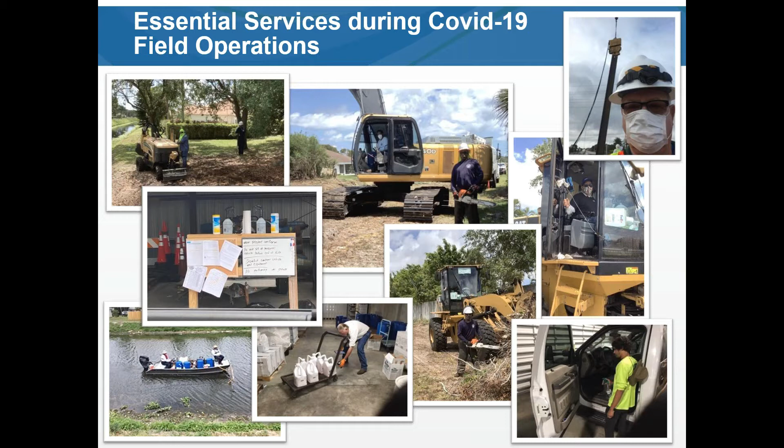You can see everybody wearing their mask, and even in the aquatics boat they managed to stay socially distanced and safe. We posted daily orders on a bulletin board in front of the shop using some old technology, but it worked really well.

In the office, we did a lot of disinfection work. We did a lot of Go-To meetings, Zoom meetings, Microsoft Teams, and it worked out quite well.

Even today, with most of the staff back in the building, we still do the meetings remotely, so we don't have to congregate and risk the spread of COVID.

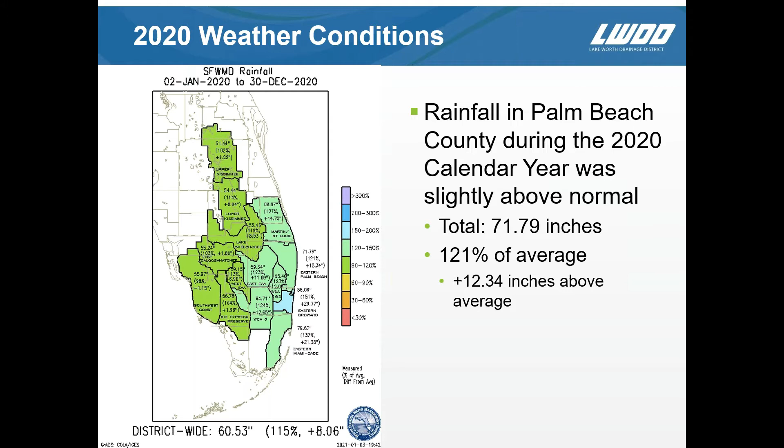With regard to weather, not much to say. It was pretty average, slightly above average in Palm Beach County. We had a total of 71.8 inches, which is about a foot above average, 121% specifically.

Another way of looking at it is to look at accumulated rainfall over the year. The green area is normal rainfall accumulation. The yellow or tan area shows below-average rainfall.

At the beginning of the year we experienced fairly dry conditions, getting about half of normal rain in April and May. Then when the wet season started in late May, early June, we were pretty much on average until October.

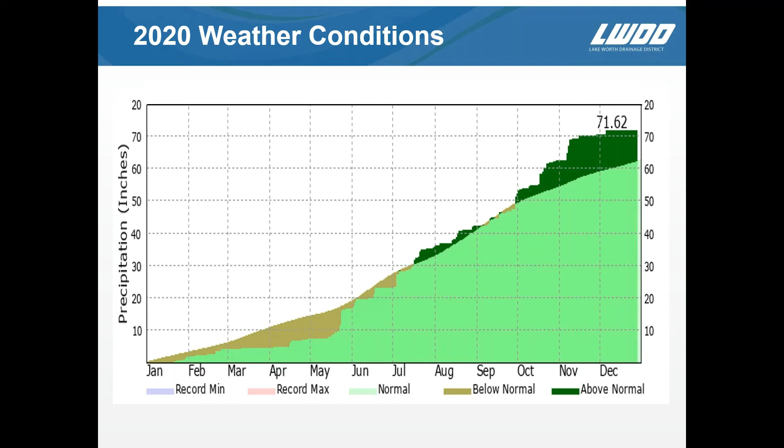The wet season started a month early, and we've been receiving above-normal rainfall ever since. That has been reflected in the current stages of Lake Okeechobee.

Lake Okeechobee got close to 16.5. The Corps of Engineers, in response to that, have been making releases to the estuaries and south into the Everglades to try to pull some of those stages down.

We expect that trend will continue, and we're going to be watching it very carefully, because while the Corps definitely needs to pull stages down to protect the Herbert Hoover Dike, we have concerns if it gets too low at the end of the dry season that we could have issues with water shortage.

Under normal operations, this is a pretty good place to be from a water supply standpoint. We wouldn't expect there'd be much, if any, competition over water supply between the estuary, urban, or agricultural users.

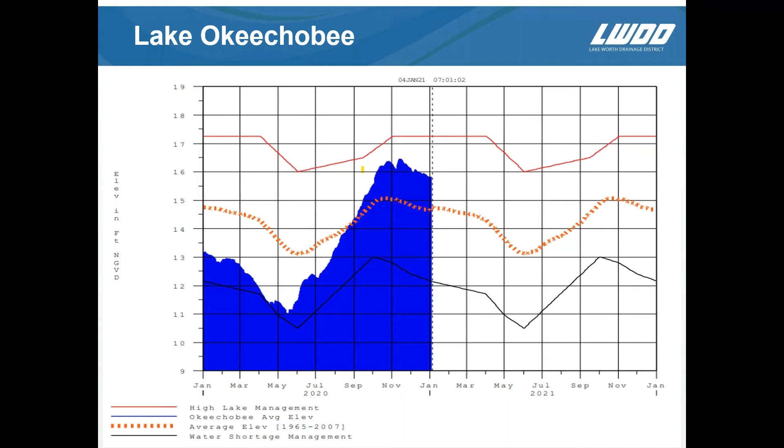But the Corps of Engineers has approved a temporary deviation that could potentially allow them to pull the lake down to very low levels, below 12, into the 10.5 range. We'll be watching very carefully what actions they take in that regard, and what effect it may have on water users in the lower East Coast.

Switching gears a little bit to capital improvements, we did have some major capital work done this year. We replaced a really old culvert crossing on the Hillsborough Canal at the intersection of Hillsborough Canal and our E1W South outfall.

You can see in the bottom left the photograph of the culvert that existed. It was decades old and was approaching failure condition.

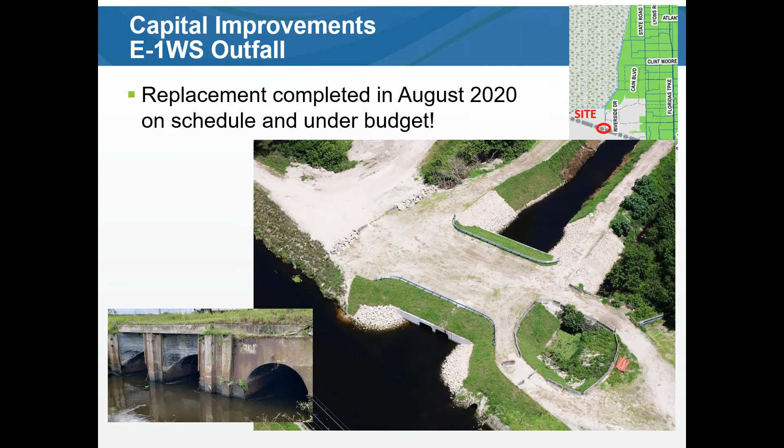And that's one of our major outfalls for the southwestern part of the district. We were happy to see that completed, and hopefully it'll last us a century or another century or so.

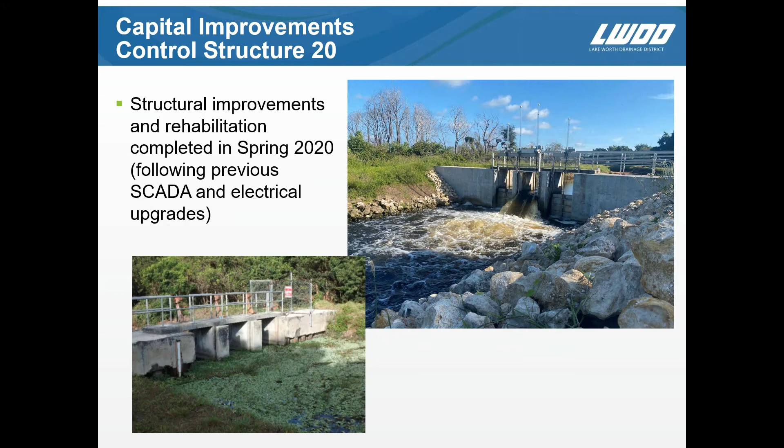We made some capital improvements to Control Structure 20, again on the same canal, E1W South. Last year we had installed the SCADA system on that so we could operate it remotely. But the engineer identified some structural problems, and we were able to go in and remediate those to get the structure back in shape, and again hopefully last us another few decades.

Control 9 was the big focus over the last year or so. We had gone out for construction bids for relocation of the structure on Stanley Weaver Canal at Lawrence Road. We received and rejected the bids, however.

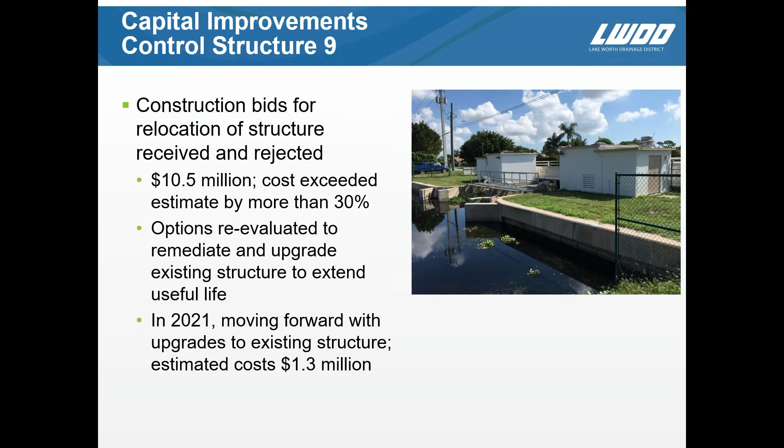The contractor's cost estimate was $10.5 million. That exceeded the engineer's estimate by over 30%. Given the concern over potential revenues associated with the COVID pandemic, we looked at options to reevaluate and remediate and upgrade the existing structure to extend its useful life as an option to relocation. So in 2021 we intend to move forward with upgrades to the existing structure at an estimated cost of around $1.3 million. Of course, structure maintenance is an ongoing part of what we do.

We regularly service and maintain 10 major water control structures. We're continually monitoring the health of that system and those components to ensure they can operate for both water supply and flood control. We instituted over the last few years a series of preventive maintenance protocols, and we completed about 120 of those over the last year, and we perform unscheduled maintenance as needed.

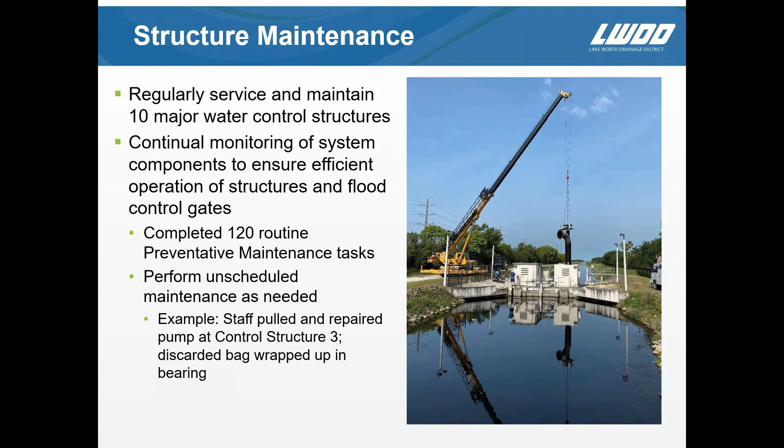This photograph is an example of that. We had a discarded feed bag wrapped up in the bearings of the pump. We had to take the roof off the structure, pull the pump out, and clean it up, but that's business as usual in Palm Beach County ag areas.

One of our biggest programs has been the Canal Rehabilitation Program. If you remember, we identified about 180 miles of canal that were impacted by extensive vegetation growth, mainly on the low maintenance side of the canals. Over the last 5 years we've been hitting that really hard. You can see the progress made to date.

We had 128 miles completed since October 2015. That was broken down: we did about 69, 70 miles ourselves, we had contractors do a little over 50 miles, and developers and other initiatives got another 5 to 6 miles.

We're almost done. We figure we have one more year remaining. We have about 53 miles remaining, and we expect completion of tree clearing this year, excluding 10 miles that has right-of-way ownership restrictions. In the past 12 months we completed 30 miles.

I just want to point out, in 2015, when we were bringing this to the board, we were hoping we could get over 7 miles a year. They've consistently done 20 to 30 miles a year. So it's a testament to the folks that are out there and all the staff here doing the work required to move that project forward.

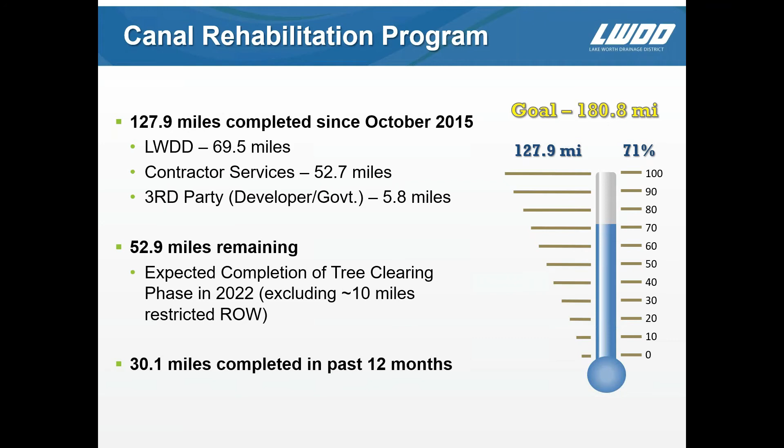It's not just a field operation. It requires coordination of district-wide staff, requiring participation by everyone. We have surveyors that research and map right-of-way. They did about 87 miles of canal this year.

We go out and photograph extensively each project, and we use a GoPro 360-degree video camera. You can see it mounted on top of the truck right there, and that allows us to have a complete view and a historical record of the condition of the canal before and after the work is done.

Then we have to field stake the canal right of way, so we know where the line is, as well as adjacent property owners. We certainly don't want to be damaging private property, and so it's important that we take those surveys and field stake the work so we can stay clear of impacting adjacent property owners.

We prepared and distributed more than 1,400 notification letters that were delivered either by hand or by mail. We fielded about 730 project-specific public inquiries through emails, telephone calls, visits here in the lobby. We hosted 7 project-specific public outreach meetings with residents and neighborhood associations, and we continually update the information and the project status on our website.

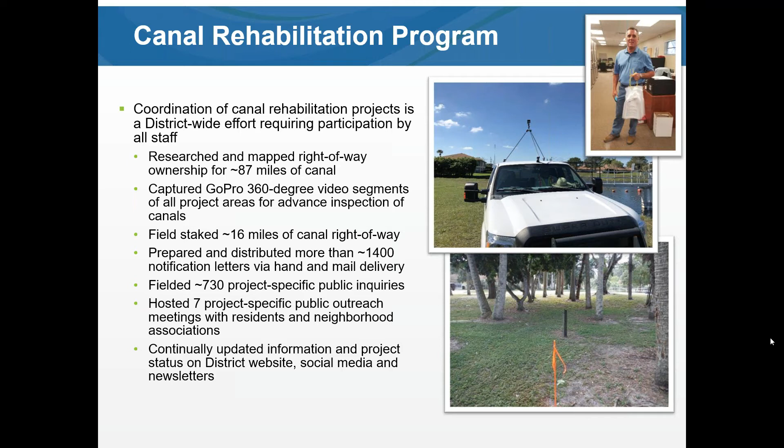And if you haven't been to it, literally every piece of information that we pull together in support of these projects is available on the website for the public.

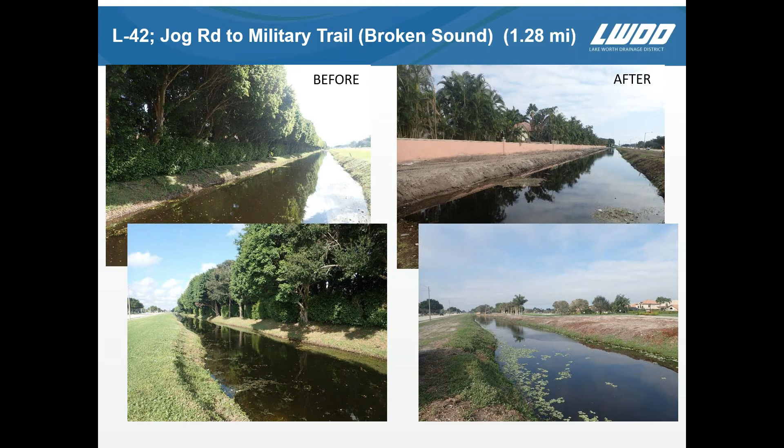Now I'm just going to quickly go through some before and after perspectives of the work that's done. Here's an example, L42 Jog Road to Military, in the Broken Sound area. This project was about 1.28 miles long. You can see before, although it was well maintained, all that vegetation on the upper left photograph is on district right-of-way. Afterwards, you can see what's just off our right-of-way is the privacy wall of the development, and a similar situation on the two photographs on the bottom.

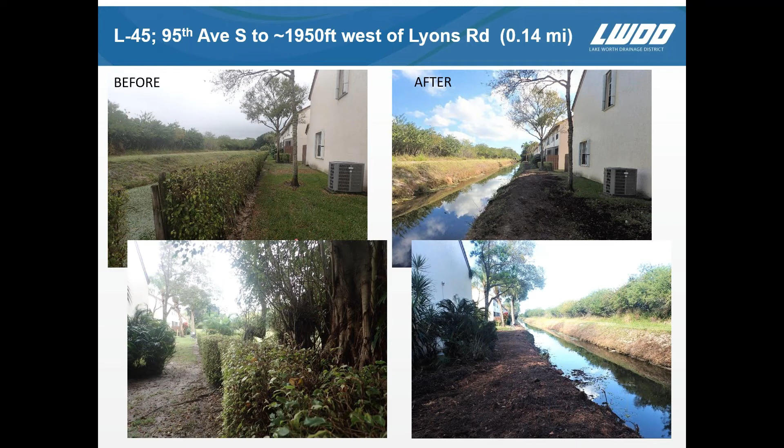L45 from 95th to west of Lyons Road. Again, you can see hedges planted, a fence, and some other things that were obstructing the right-of-way that were cleared in the project. It was about 0.14 miles.

Similar situation on the Spanish River. It's CCRP number 8, portions of L12 and L13.

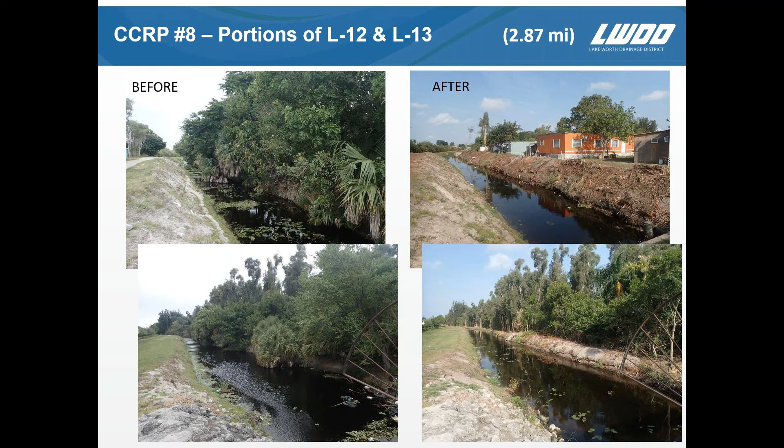Here's a reach of the canal that we actually didn't do the work or have a contractor do it. The adjacent development, that's a brand new development on that upper right photograph, came in and developed a previous agricultural parcel, and in doing so, they restored the canal bank and removed any vegetation that was in the way.

E2E from L42 to Clint Moore, Okeeheelee Park - again, there we only removed Australian pines because of the limited right-of-way that we had. But those particularly can cause problems in a wind event. The root system isn't adapted very well to the high water table we have in South Florida, so when the wind blows, those things just tip over. We try to focus on those as an area of priority whenever we can.

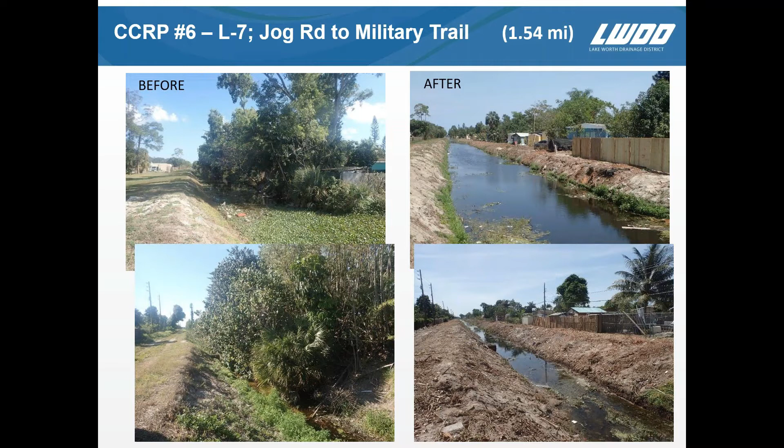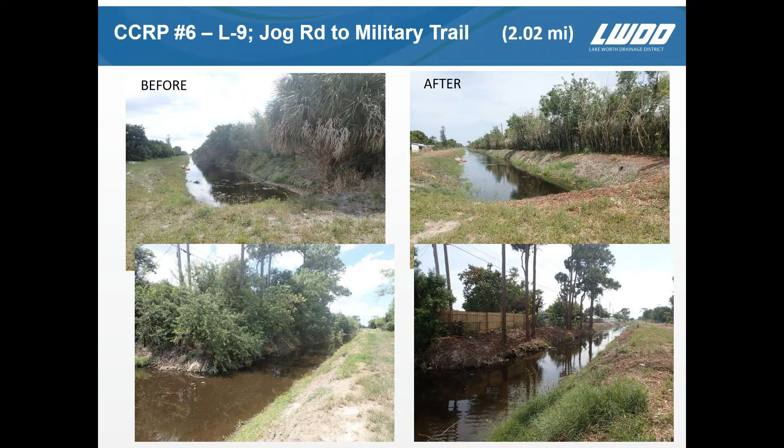This is L7, Jog Road to Military, and again almost all that vegetation was exotic. Similar situation on L8, L9 - and you can see on the bottom right on L9, there's some pine trees, native trees that were left, and we left them there. Hopefully they'll get through this okay.

Now, you might ask, how did we get over there to clean that out? The answer is we hired a contractor. They had a barge and floated the heavy equipment in. They'd put the debris on the barge and haul it off to where we could pick it up and put it in a dump truck. So it was a particularly challenging reach of canal, and we managed to do it without any real impact to the adjacent refuge.

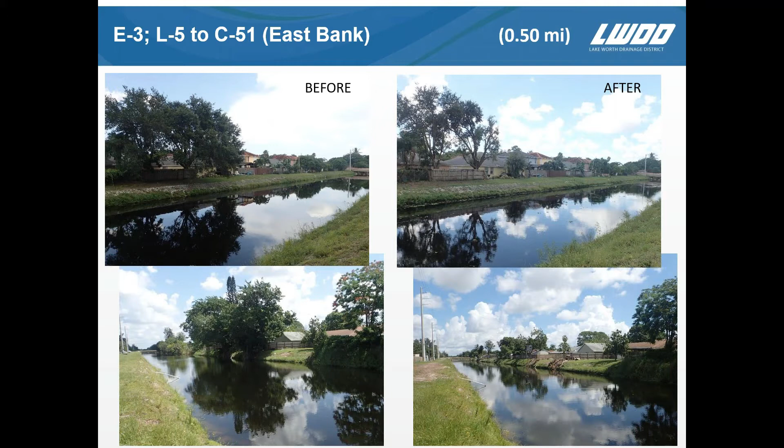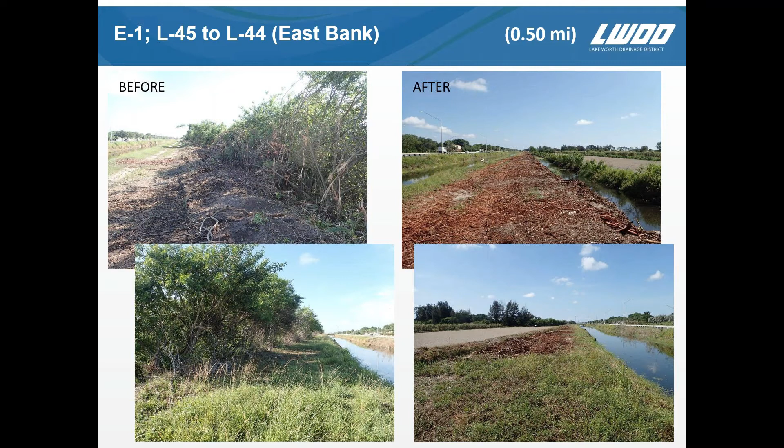Now, because it's exotics, you've got to come back pretty quickly and treat that area so you don't start having Brazilian pepper seedlings pop up and take over again. But that becomes a part of our additional maintenance that we pick up when we clear these areas, and we'll talk about that in a minute too.

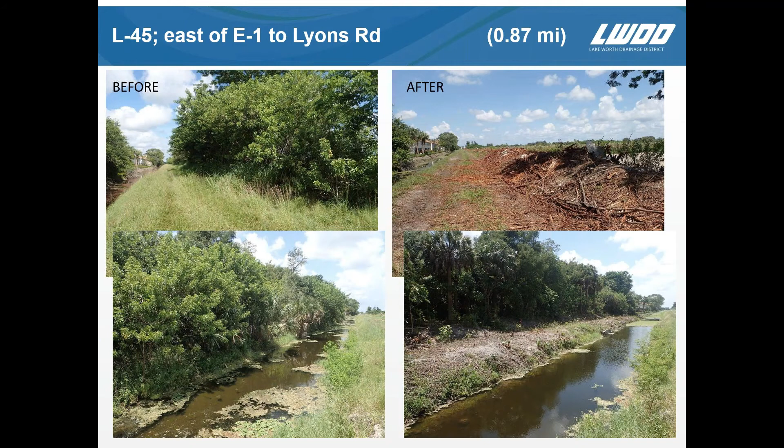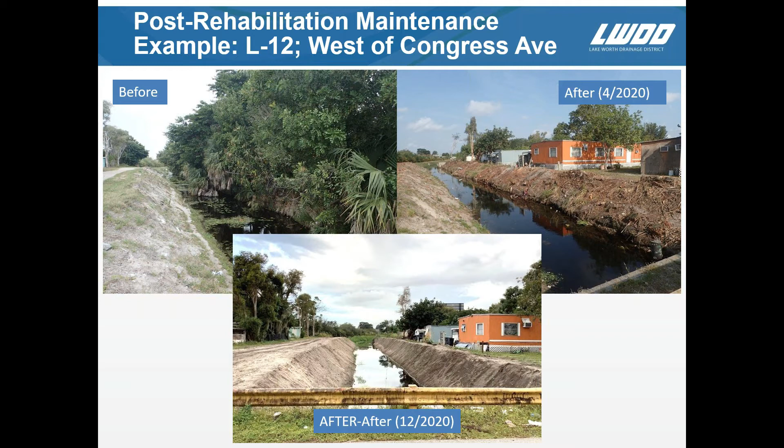E3. Here's one where we had gone in, cleared the area, and now we had the opportunity to go in and do some work on the canal. So it's that bottom center photograph where now that the canal is clean, we make an assessment on the hydraulic capacity, and if we need to, we come in and shape the banks to do two things: one, to ensure we have the hydraulic capacity, but also to assure that we have sufficient space on the canal banks to mobilize equipment to do maintenance work.

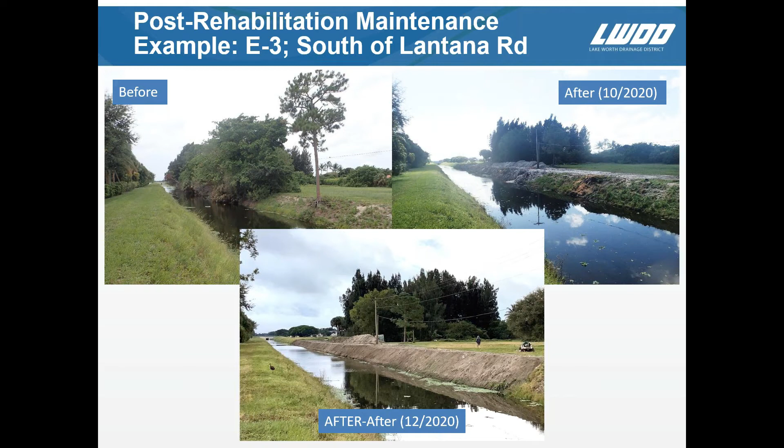Here's another post-rehabilitation area where we cleared it off, and then now we had to come back and do some work to the canal banks.

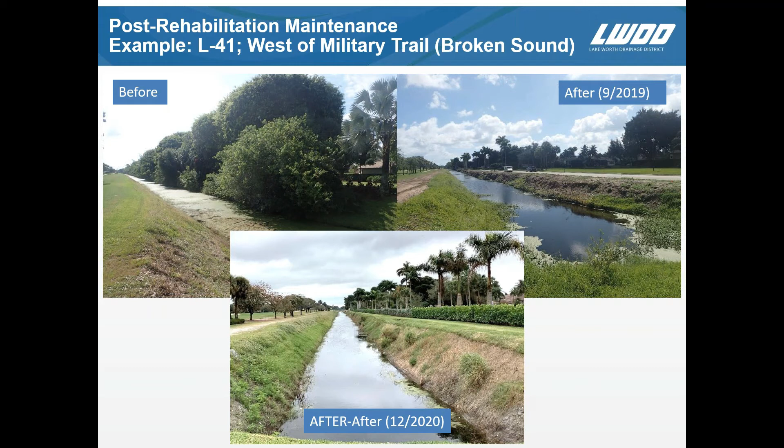And again, here's Broken Sound again, and the after photograph there in the center. We worked really closely with them. If y'all know Broken Sound, they had beautifully manicured ficus trees on the border of their property. It was part of the amenity of the development. And of course, a lot of people had concerns about what was going to be the condition of the right of way after we removed those specimen trees. We worked with their landscape architect, with the homeowners association, and a lot of residents, and what they planted back, you can see on the center bottom photograph. And of course, all of that is outside of our right-of-way now. They're happy with it, and we're happy with it, so I'm calling that a success.

Here's another photograph, same project there in Broken Sound.

As I mentioned, now that we clear these areas, particularly on the high maintenance side, it's very wide, it gives us plenty of room to park equipment, to do work like you see in the upper right photograph. The low maintenance side is much narrower, and that was established literally back in 1915, 1920, when the district was first laid out. The idea was you just reach across the canal if you want to do maintenance. And of course, that's an awkward situation.

Back when you had farms there, it was pretty easy to do, but when you have residential development, now it becomes potentially a hazard. So we had to create and look at new technologies to help us maintain these narrower top of bank areas. We use a skid steer, I'll show you in a minute. We got a little spider mower, we're experimenting with that. We actually installed one of those grinder units on one of our long reach excavators so we could reach over the canal and grind material where we don't have access to travel. And of course, herbicide treatment is kind of the last resort, but we have that available as well.

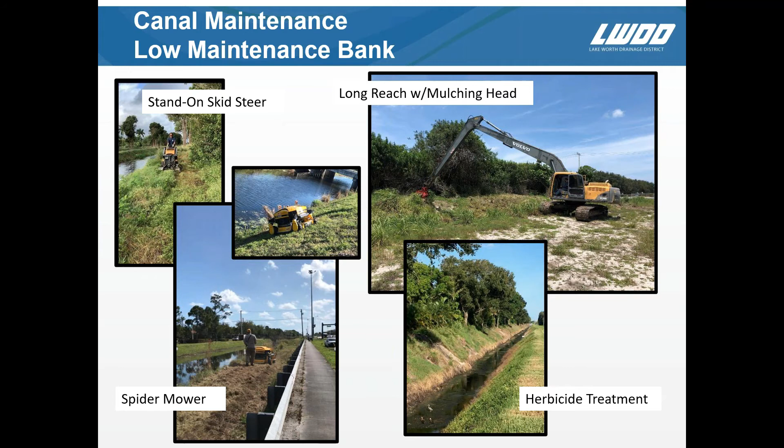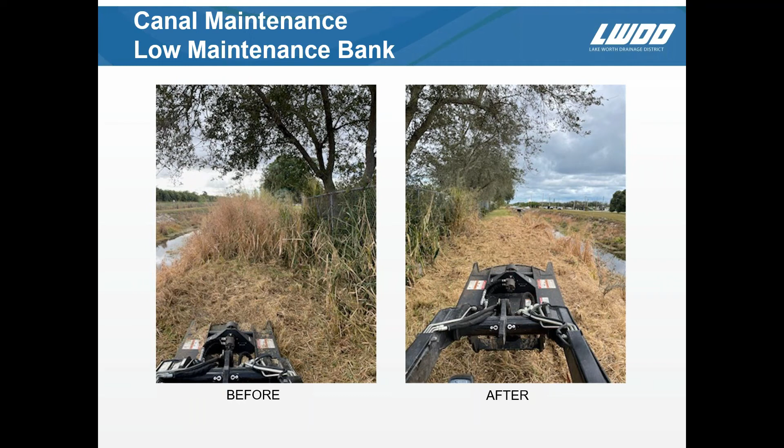Here's before and after, the typical stuff you see on this low bank area, low maintenance area, after we clear the trees. Obviously, grass can now grow up, we need to mow it, but it's too narrow for a typical tractor. So we purchased a mower unit that we could install on a skid steer, which is fairly narrow, and we can get it in those tight areas and still continue to maintain those.

We had 485 miles, which we do 3 times a year. We renewed our annual contract for mowing services, and we don't contract everything, but we have some long, fairly open reaches like the E1, E2E, and E2W, where we contract those services. Under contract, we mowed about 92 miles and slope mowed a little over 100.

We're going to increase our contracted services in fiscal year 21 with an estimated cost of about $375,000, with 140 miles of flat mowing, 155 of slope. Our low maintenance areas are about 65 miles, and we've included some money in there for aquatic weed maintenance in southeast Boca Raton.

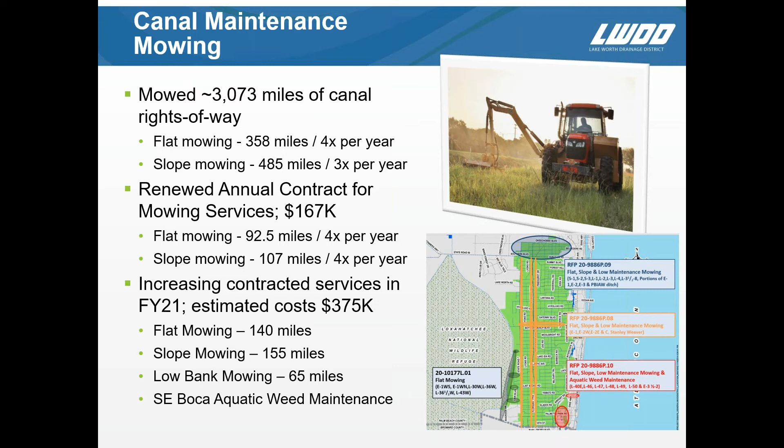Vegetation management is obviously a big part of what we do. We could have the canal banks and the canals in perfect condition, but if we let invasive aquatic plants take over, it can choke the water flow. So this year we treated about 4,700 acres of aquatic vegetation, and in support of our low maintenance areas that we've opened up, about 600 acres of upland vegetation.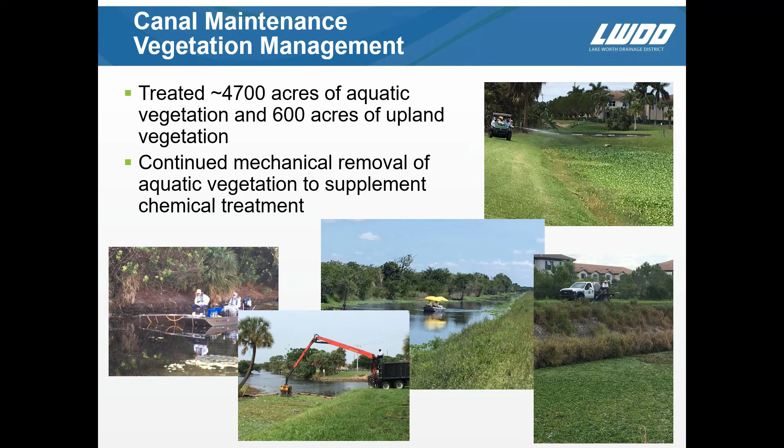We've continued mechanical removal of aquatic vegetation to try to reduce and supplement chemical treatment. Part of that is the use of aquatic weed booms to manage the aquatic weeds and trash. We currently maintain a total of 147 boom sites throughout the district. What that does is catch this aquatic vegetation, kind of pin it up, and then we can surgically go in there and either remove it mechanically or treat it with chemicals, but it keeps us from chasing it around up and down the canals, whichever way the wind's blowing.

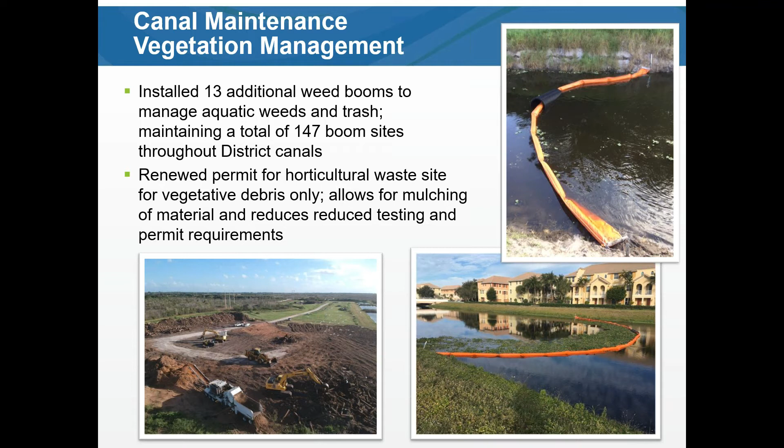Associated with all this, we renewed our permit for the horticultural waste site that we use for vegetative debris removal and stockpiling. The new permit allows us to mulch the material, and it allows us to reduce testing and permit requirements because we can now chew that stuff up, sell it, haul it off, and regain capacity at the debris site.

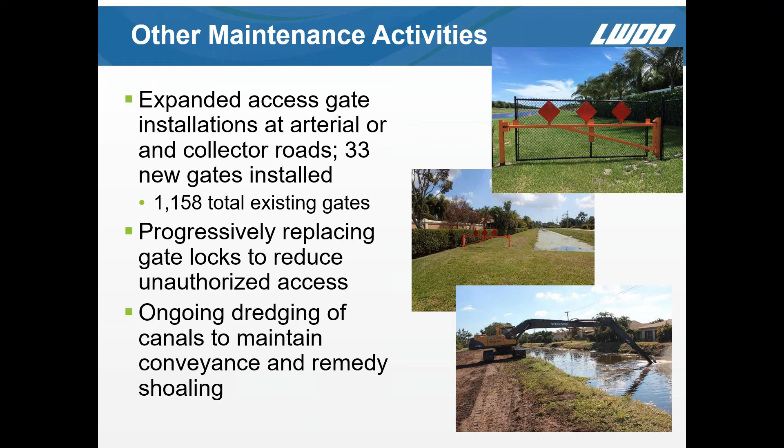Other maintenance activities: we expanded access gate installation, shown in the upper right - that's one of our new typical gates. We've installed 33 new gates this year. We have 1,158 total gates across the district, and we're progressively replacing gate locks to reduce unauthorized access. The ongoing dredging of canals to maintain conveyance and shoal removal is another maintenance activity.

What you see when you come to the campus here is a lot of work's been done over the last 5 years. My predecessor, Bob Brown, he was really focused on improving the campus site, and you can see this auditorium is an example of that.

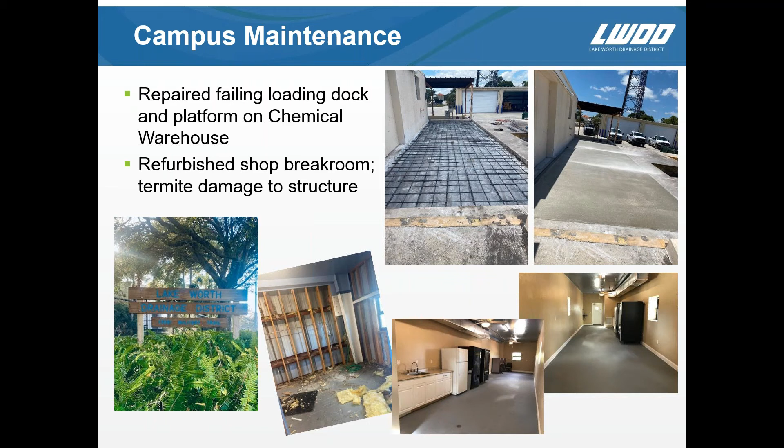But we did have a couple of projects this year. We replaced the landing deck at the aquatic maintenance building loading dock - it was failing in some respects, so we needed to replace that. And with COVID, our field staff don't congregate as much in the break room we have over in the shop, so we took the opportunity to refurbish that. It had a lot of termite damage and other issues, so we wanted to get that back up so the field staff will have a nice place to be when they can get back together.

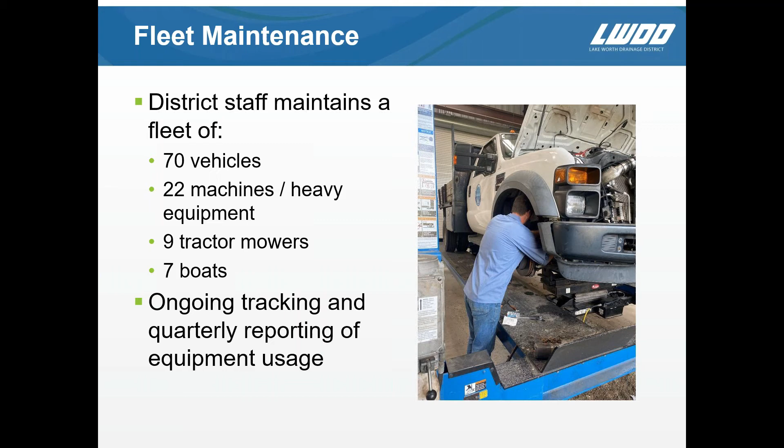Fleet maintenance is another important aspect of what we do. We maintain 70 vehicles, 22 machines or pieces of heavy equipment, 9 tractor mowers, and 7 boats. We ongoingly track and report on the quarterly usage of equipment.

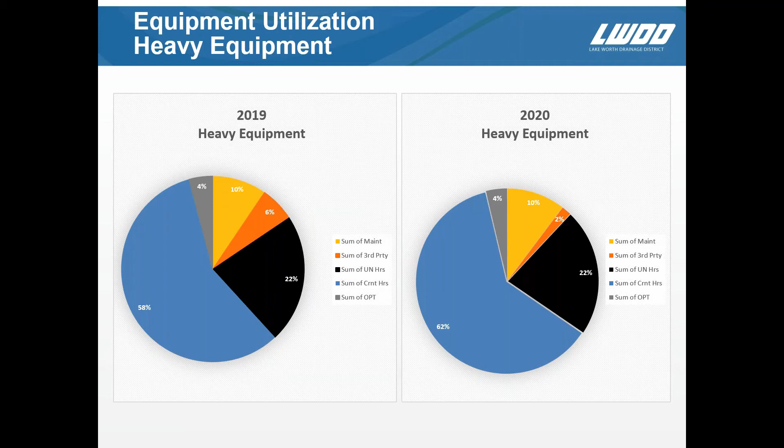I won't go into detail on this except to say that the blue portion of the pie for heavy equipment, comparing 2019 to 2020, is the machine doing actual work. The black wedge is not work - it's when they're mobilizing, going from site to site, or when staff is getting training, fueling equipment, or other things. And of course, the yellow and orange are when it's undergoing maintenance. We've been tracking this for a number of years, and those numbers don't move very much - they're very consistent with the national standard. That's the heavy equipment slide.

With regard to right-of-way regulation, we received 421 right-of-way permit applications, a 12% increase from 2019. We had a little under 800 annual deliverables required for 644 individual permits. That includes fees, inspections, insurance, and we have a 93% compliance rate.

We collected 100% of our annual fees, about 15,500 for service agreements, and around 50,000 for permits.

In addition to searching for permit information, our customers can now apply online for permits and pay fees online. So they can get to the information associated with their permits, and apply and make payments all online.

We researched and responded to 6,420 Chancery Case 407 review requests, a 50% increase from last year. That's kept some of our staff pretty busy dealing with the title companies on that.

We completed 488 plat and development reviews for county and municipal projects, and completed a mapping project for all permit boundaries, a total of 15,500 that we've mapped.

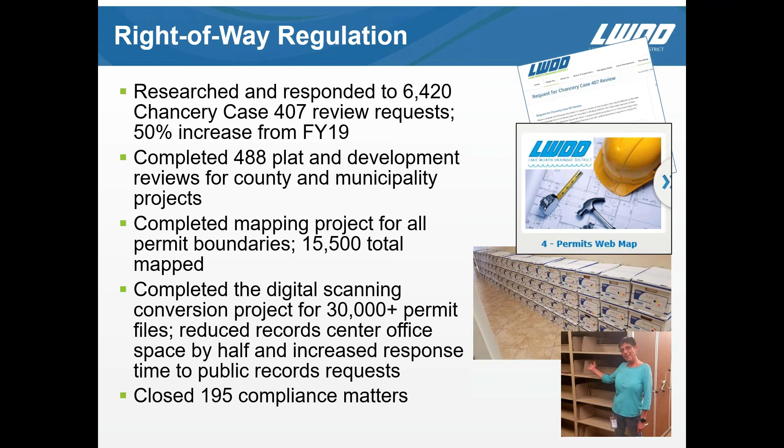You can see on the bottom right all the boxes of files that were sent to scanning, and that's freed up a lot of storage space that we had allocated for files in the building.

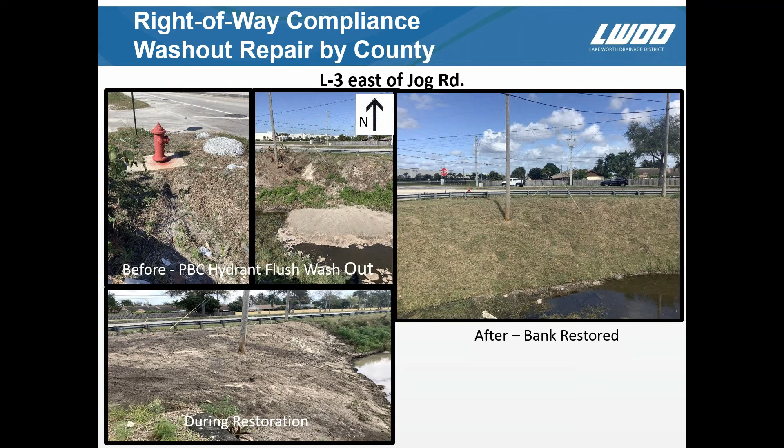That also happens with private landowners who either knowingly or unknowingly put things in their backyard that are actually on our right of way. This is one of the most extreme examples - our staff referred to it as the Florida Dream, because they had a beautiful tiki hut, bar, and patio overlooking the canal. The only problem was about half of it was on our right of way. We contacted the owner and worked with them very carefully, and to their credit, they removed the portion of the tiki hut and the pavers.

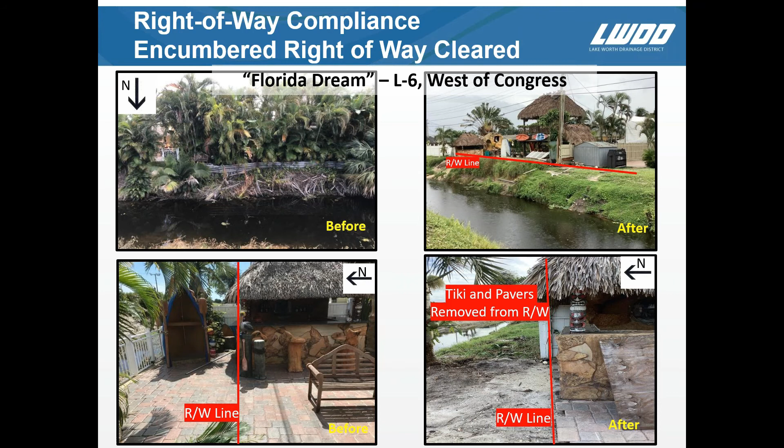They're on their property now, and that opens up our property to be able to do maintenance. Here's another example on E3 north of Summit Boulevard. A nice patio deck had been constructed on our right of way, and again, the owners, to their credit, removed the obstruction, and now we have access.

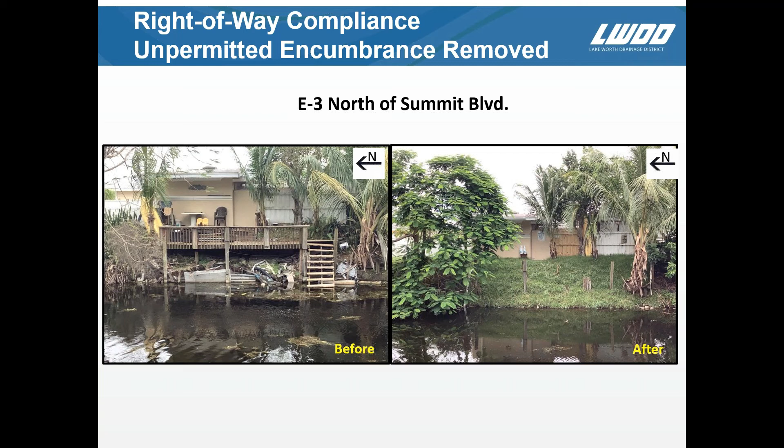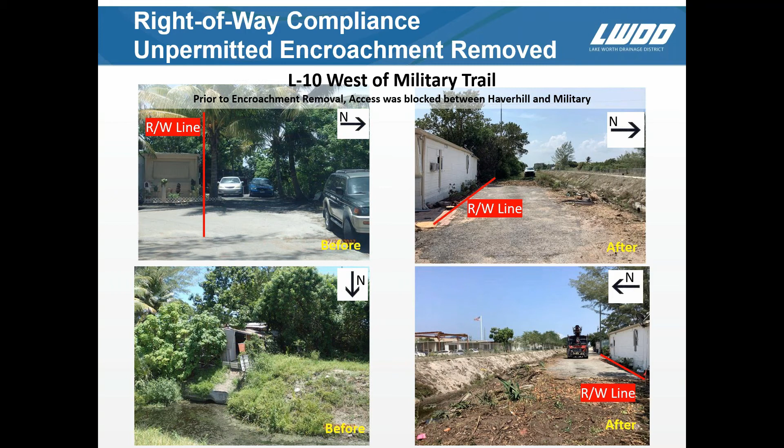Here's another example where it wasn't necessarily a physical structure, but they had a parking area adjacent to their lot that they utilized that was on our right of way. They removed the vehicles, and now we have access to that.

They cleared it. The upper right-hand photograph shows what it looks like today, and now you can see there's a house back there. Again, it opened up the area so that we could traverse the right-of-way and do maintenance.

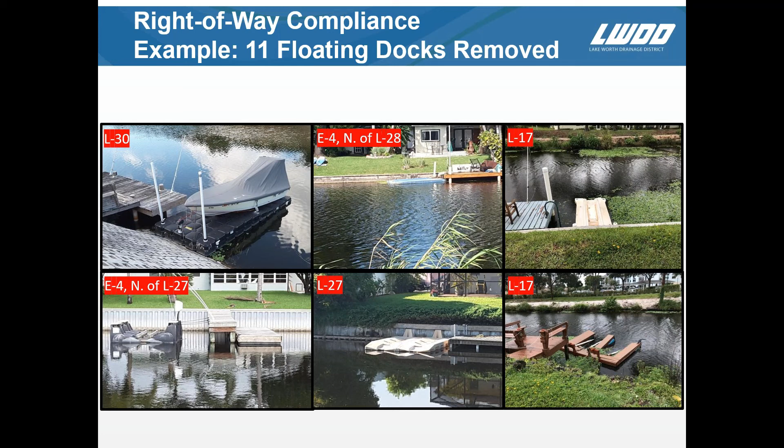We had 11 floating docks that were removed. Floating docks are nice in a lake, a great amenity to have, but when you're in a canal and canal flows in some areas can exceed 10 feet per second, it's a recipe for a real problem. So we don't allow floating docks, and our inspectors worked with a lot of adjacent property owners to get those removed.

Public information education is really important to us. It's promoted at LWDD for community events. We did it prior to COVID-19, and we continue to do it.

We participated in virtual events with residential and civic groups. We hosted the first virtual annual flood control workshop where we doubled the attendance of property managers to 120. Even after COVID, I think we'll probably continue to have some aspect of virtual attendance so that as many people as can make it have it available.

We've had 5,000 satisfied inquiries related to field activities and public records requests, and we continue engagement on social media, Facebook, Twitter, and LinkedIn.

We don't talk about it a lot in public, but employee safety is probably one of the biggest things we focus on. Administratively, we continue to focus on employee safety in the workplace. We've had no new or active workers' comp claims, which when you look at the type of equipment we operate and the environmental conditions - the steep slopes, the narrow access areas, the proximity to residents - that's quite an achievement.

We have regular safety committee meetings for review of accidents and incidents, and we discuss preventive measures for those accidents. We have ongoing safety training for employees, level 2 hazmat spill team certification. You'd be surprised how many times something or somebody goes into our canal and spills either fuel, oil, or other chemicals that we have to respond to. We had a guy at a local fast food store dump a bunch of French fry oil in the canal. I had to deal with that.

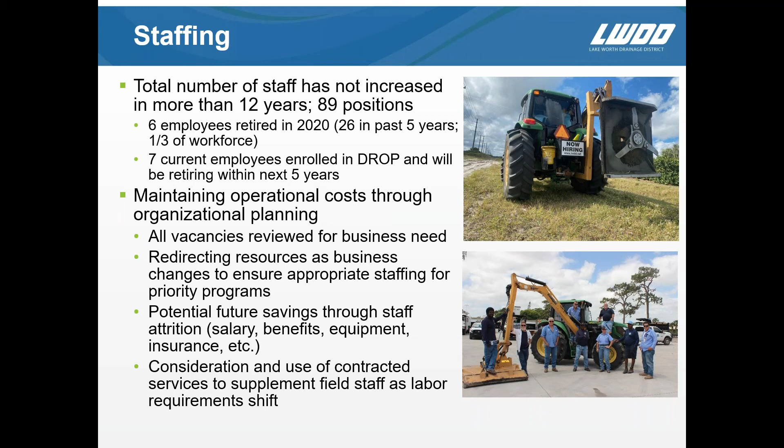We're maintaining our operational costs through organizational planning. All vacancies are reviewed for business need, and we redirect those resources as the business need changes. Potential future savings are possible through staff attrition with regard to salary, benefits, insurance, etc., and consideration and use of contracted services to supplement field staff as labor requirements shift.

With regard to financial highlights, the auditors issued annually an unqualified opinion for fiscal year 2019. Financial records and statements are fairly and appropriately stated in accordance with generally accepted accounting principles. The board adopted a fiscal year 21 budget of $16.2 million. Our non-ad valorem annual assessment is $49.50 per acre or subdivision thereof. We have $4 designated for accelerated canal rehabilitation, which I described earlier, and $3.50 for improvements in different districts' infrastructure - our major structural work that we're ongoing.

We have a $42 operating budget that has not increased in 6 years. Revenues that we receive, in addition to that, we have permit fees this year around $877,000, interest earnings around $262,000, quitclaim deeds almost $4,000, and right-of-way agreements like our tower leases around $83,000.

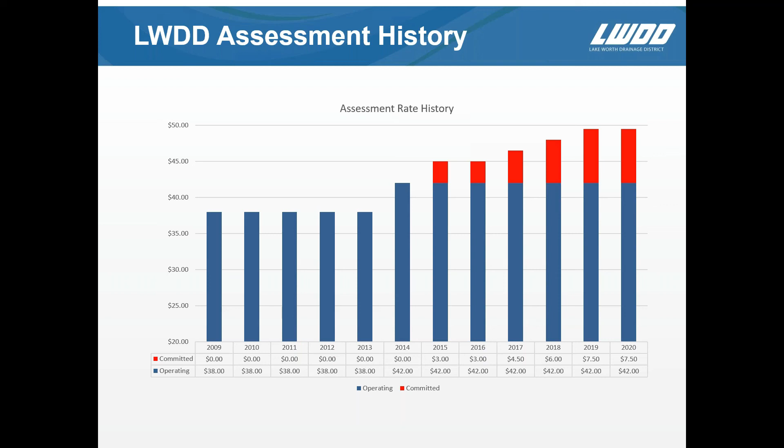And we solicited and awarded bids for sale of development rights within the ag reserve as a potential funding source in the future. Here's a breakdown over the years of our assessment rate. The blue bars represent our operating expenses, and you can see we only raised them once there in 2014. Then on top of that, we attached a committed, dedicated funding source portion of the assessment for the canal rehabilitation projects and our structure program. We can't spend that money on anything else, and as we finish these programs, the board will have the opportunity to look at the possibility of even reducing that assessment.

SCADA stands for Supervisory Control and Data Acquisition. It's the computer automated system that now can control remotely our water control gate operations. It works a lot like a thermostat here in the auditorium. If it gets warm in the room, the computer turns the compressor on and it gets cooler. If it sees water getting high out there, the computer system will see it and open the gate accordingly, and when rain passes and water starts falling too low, the gates close. We monitor it 24 hours a day. I can look at it on my cell phone, literally anywhere in the world, and make operational changes if we need to. It's probably been one of the biggest, most successful improvements this agency has made, and we save a lot of water as a result because we're not over-dumping to compensate for what we think we may get in regard to rainfall.

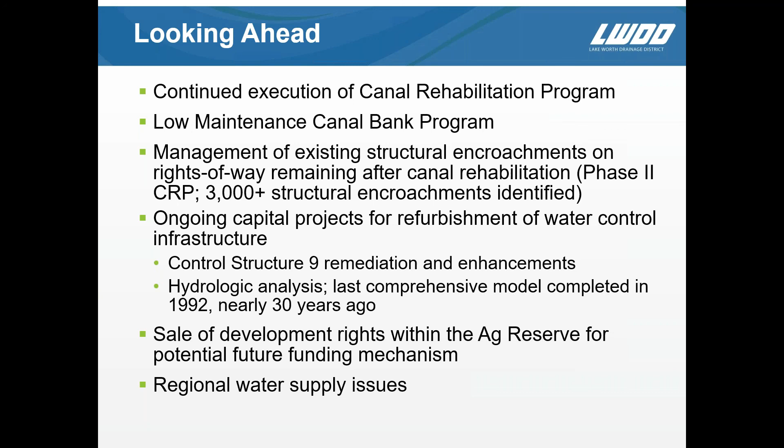And in none of that I just described did I mention climate change or sea level rise, and those are both going to have impacts on what we do and how we do it. So that's going to be a bigger issue in the years to come, and I just wanted to mention that. With that, if you have any questions, I'll be glad to try to answer them.